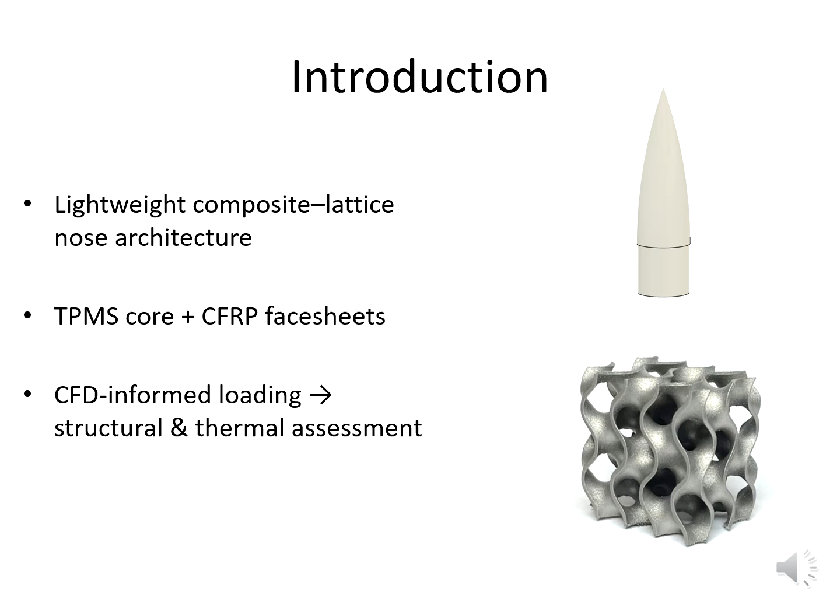The goal is not simply to design a geometric nose cone, but to engineer a lightweight, stiff, and thermally reliable structure that can withstand aerodynamic pressure and vibrational loads typical of a small amateur or student research rocket. The framework we propose allows us to trace the influence of aerodynamics, homogenized lattice mechanics, composite layups, and thermal effects within one consistent analysis pathway. This helps reduce uncertainty and prepares the design for future manufacturing and testing.

The motivation stems from the limitations of common fabrication methods used in student and experimental rocketry. Purely 3D printed nose cones made from PLA, ABS or PETG are convenient and easy to produce, but they tend to deform under aerodynamic loading, soften at moderate temperatures, and lack predictable structural behavior. On the other hand, fully composite nose cones, while exceptionally strong, require careful layup design, added tooling, and more engineering effort.

Our approach aims to combine the best of both worlds by using a very thin composite facesheet to provide high stiffness and strength, supported by a TPMS core that stabilizes the skins and prevents buckling. This sandwich approach significantly increases stiffness to mass ratio while keeping manufacturing accessible.

To evaluate this design, we use a fully integrated ANSYS workflow linking CFD-derived pressure loads, Material Designer homogenization for TPMS, composite ply analysis, and thermal simulation. This reduces the guesswork and allows us to refine the structure before any physical prototyping.

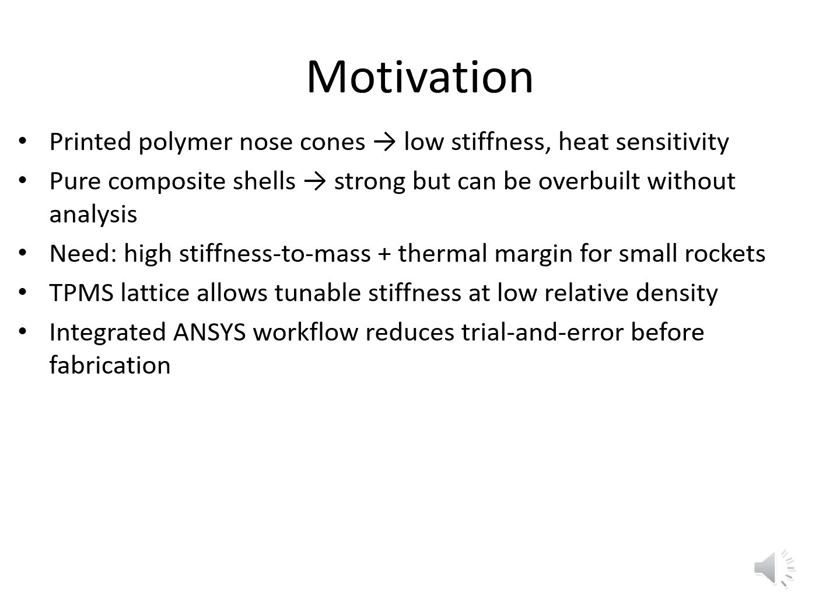The structural architecture is a classic sandwich construction adapted for small-scale aerospace components. We use two 0.15mm carbon fiber facesheets which provide most of the bending and in-plane stiffness. Between them we incorporate a 1.5mm gyroid TPMS core. Gyroid lattices are extremely efficient because they feature continuous curvature and uniform load paths, unlike random infill or honeycomb structures.

One of the major advantages of TPMS cores is that their stiffness and density can be tuned simply by adjusting the relative density parameter. This allows us to tailor the mechanical response to match specific mission requirements without changing the outer geometry. The combination of these facesheets and the lattice results in a structure that is exceptionally stiff for its weight and inherently resistant to local buckling. This makes it an excellent candidate for components like nose cones, which must withstand aerodynamic pressure and vibration while remaining very light.

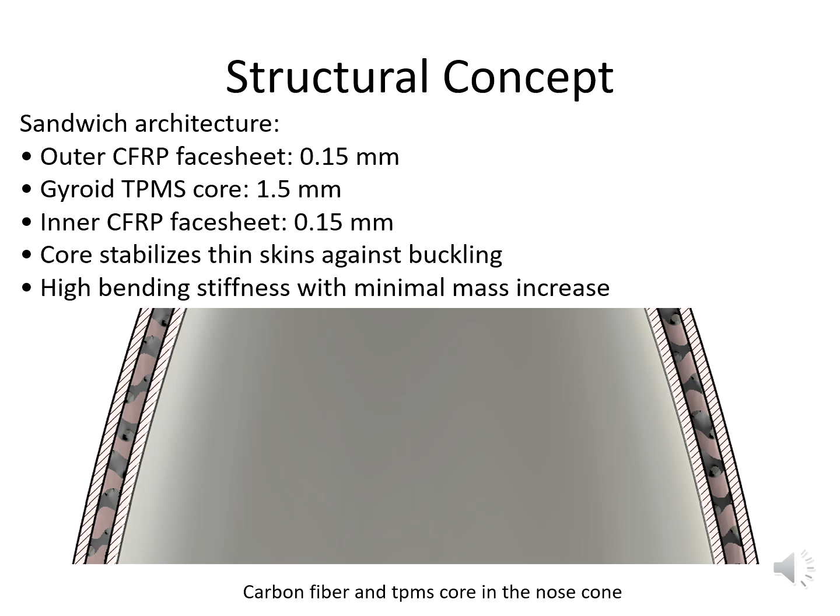To properly simulate a TPMS structure, we cannot directly run a full 3D analysis of all the lattice struts as it would be far too computationally expensive. Instead, we use ANSYS Material Designer to build a representative unit cell of the gyroid lattice and apply periodic boundary conditions. This allows us to derive an equivalent orthotropic material with stiffness, shear moduli and Poisson ratio that accurately represents the mechanical response of the full lattice.

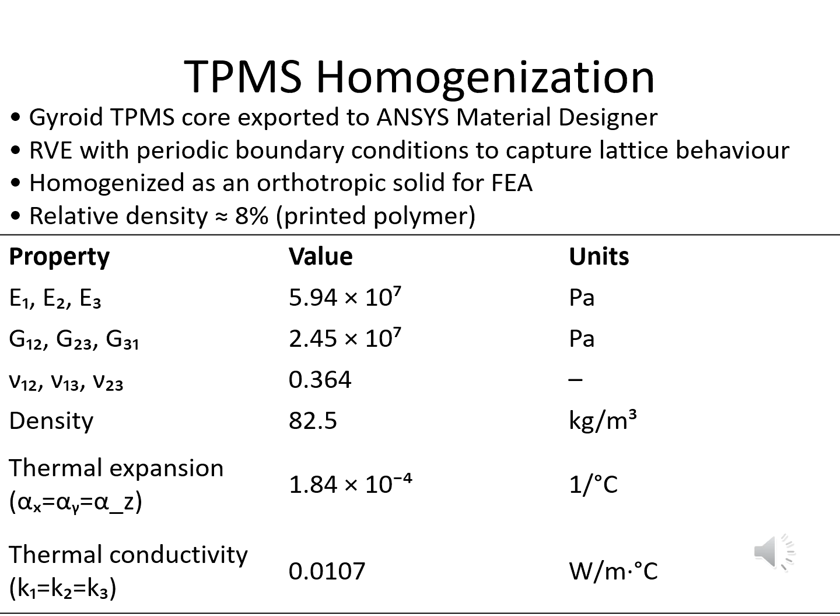For a chosen relative density of approximately 8%, the homogenization produces an effective Young's modulus around 59 MPa, shear modulus near 25 MPa, and density of 82 kg per cubic meter. These values match well with published experimental data for polymer TPMS structures. Once homogenized, the material model replaces the complex lattice geometry and can be used directly in static, dynamic, and thermal analysis. This greatly simplifies the FEA while preserving the key physics of the TPMS behavior.

The composite facesheets are modeled using ANSYS ACP Pre-Post with a quasi-isotropic layup of 0 and 90 degrees. This configuration provides balanced stiffness which is ideal for components that experience multidirectional loading.

The carbon fiber material properties, longitudinal modulus, transverse modulus, shear moduli, and strengths were added along with the necessary thermal properties such as thermal conductivity and specific heat. These thermal values are required to support the transient thermal analysis and ensure the composite behaves realistically when exposed to aerodynamic heating. Failure evaluation uses established criteria including Tsai-Hill, Tsai-Wu, and Hashin.

These methods allow us to evaluate different failure modes, such as fiber tension, fiber compression, matrix cracking, and shear failure at the lamina level. By combining the laminate definition with a homogenized core, we obtain a fully consistent model of the sandwich cross-section that supports both structural and thermal loading.

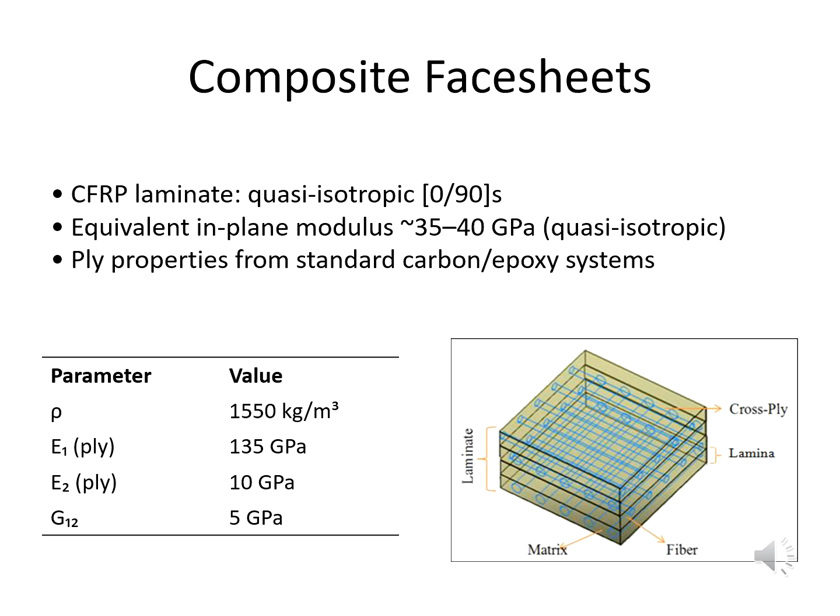The CFD portion of the project is not meant to optimize the aerodynamic shape of the nose cone. Instead, its primary purpose is to provide accurate pressure distribution along the external surface that can be transferred into the structural FE. We use ANSYS Fluent to simulate axisymmetric external flow at Mach numbers from 0.3 to 1.2, covering subsonic to mild transonic regime. A structured mesh with an inflation layer ensures y+ values close to 1, allowing the SST k-omega turbulence model to accurately resolve the boundary layer.

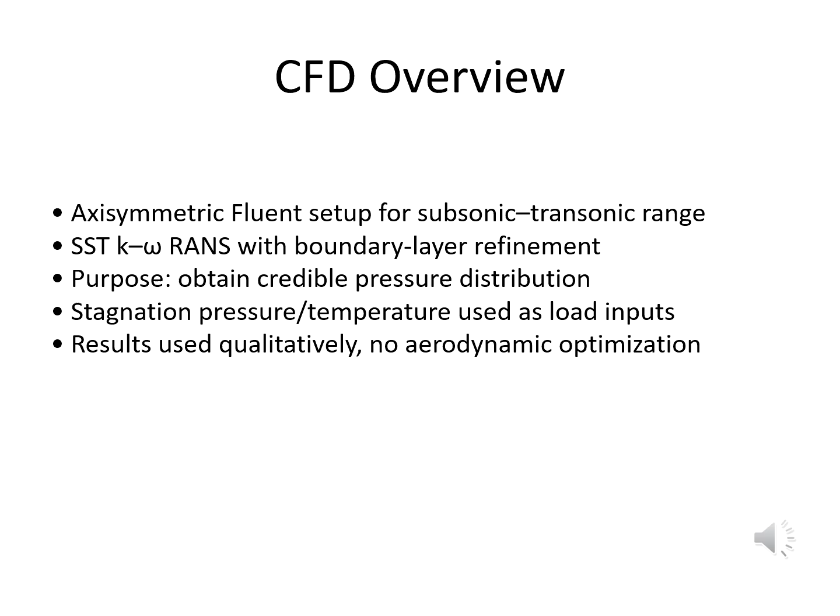The CFD results include surface pressure coefficient maps and integrated drag values, forming the basis for the aerostructural coupling. This ensures that the structural analysis reflects realistic aerodynamic loading rather than simplified or guessed load cases. The structural analysis is performed in ANSYS Workbench, using a combination of layered shell elements for the composite skin and solid elements for the homogenized TPMS core.

A cohesive interface is inserted between the skin and the core to capture interfacial shear transfer and potential delamination, an important failure mode in sandwich structures. The base of the nose cone is fully constrained to replicate the attachment point on the rocket body. We then apply the CFD-mapped aerodynamic pressure, which provides realistic distributed loading.

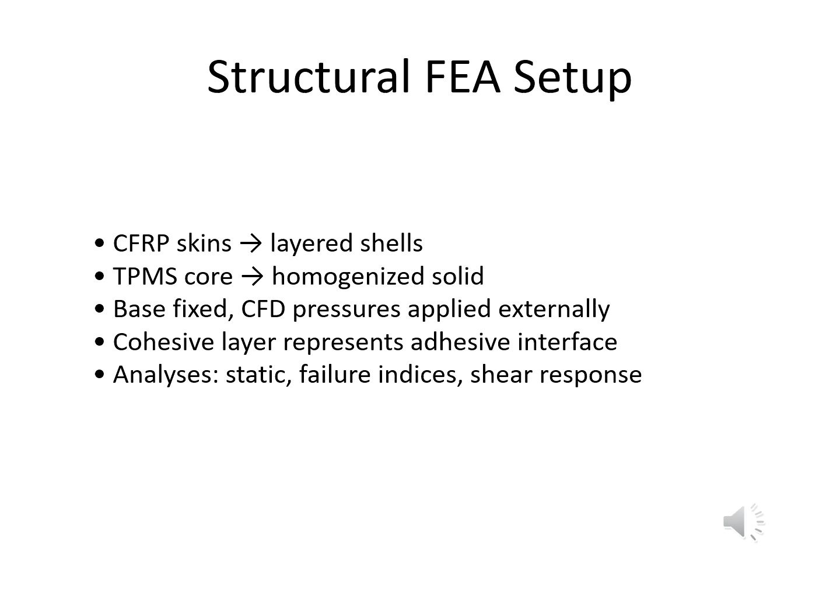This modeling approach captures bending, membrane stress, shear transfer through the core, and potential interface failure. It also allows us to identify buckling modes and natural frequencies, ensuring the structure remains stable under aerodynamic and vibrational conditions. With this setup, we obtain a comprehensive understanding of how the nose cone behaves mechanically.

Across the load cases, the nose cone demonstrates extremely high stiffness relative to its mass and size. Under realistic aerodynamic pressures, deflections were extremely small. The composite face sheets showed failure indices far below unity for all Tsai-Wu and Hashin modes, indicating very large safety margins. The TPMS core itself remained within elastic limits and no core shear collapse was predicted. These results confirm that the sandwich architecture performs exceptionally well.

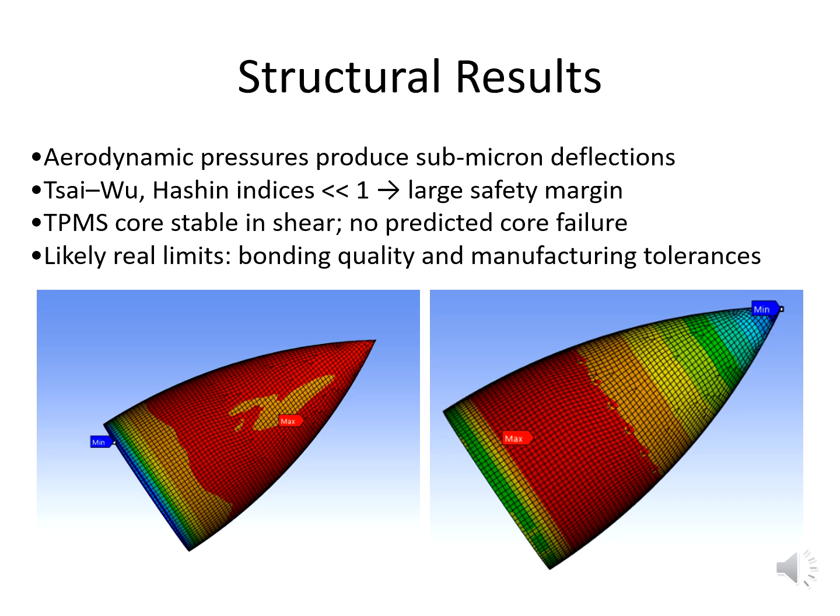The likely limiting mechanisms are not global bending, but rather local phenomena such as core crush, adhesive failure, or interface debonding during extreme loading or manufacturing imperfections. This gives us a clear direction for future physical testing and refinement. Transient thermal simulations are planned but were not completed within the available project timeframe. They will be included in the next phase of this work.

In summary, we developed and demonstrated an ANSYS-based workflow that integrates CFD, TPMS homogenization, structural analysis, and in the near future, thermal evaluation. The TPMS core provided excellent stiffness to mass performance, while the carbon fiber skin carried the major loading with very high safety margin. The sandwich structure showed minimal deformation under aerodynamic conditions.

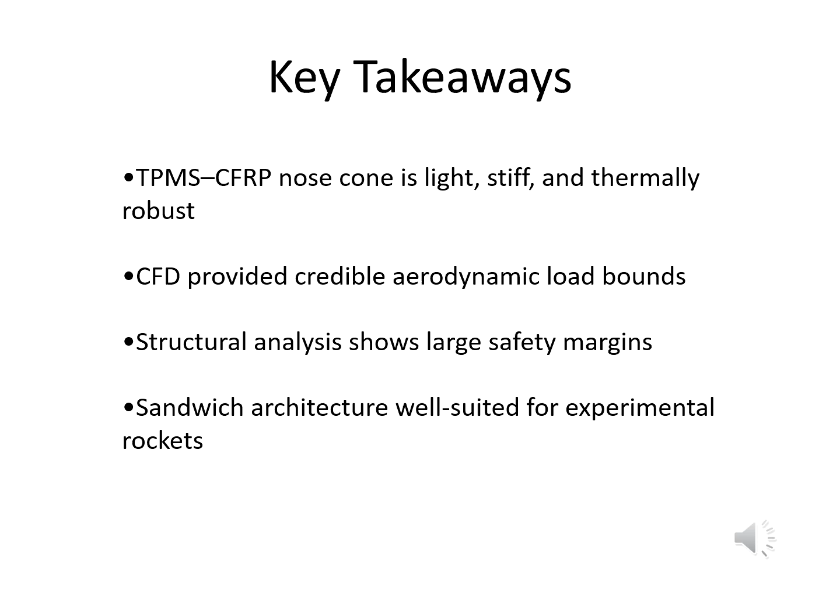This integrated approach reduces uncertainties, supports efficient design iteration, and prepares the structure for experimental validation. It also demonstrates the potential of TPMS-based sandwich composites in aerospace applications beyond just the nose cone. Looking ahead, future work will focus on selected extensions of the current framework. This includes non-linear effects in the TPMS core, experimental testing to support the numerical models, and transient thermal analysis for short duration flights. Overall, the aim is to gradually move from purely numerical validation towards a targeted experimental verification.